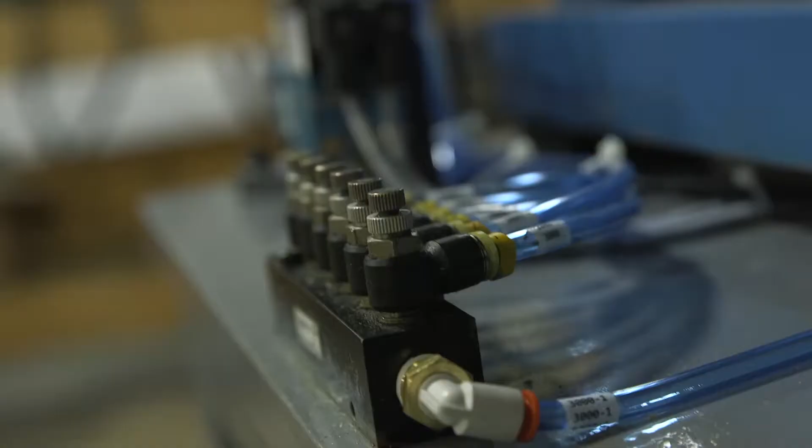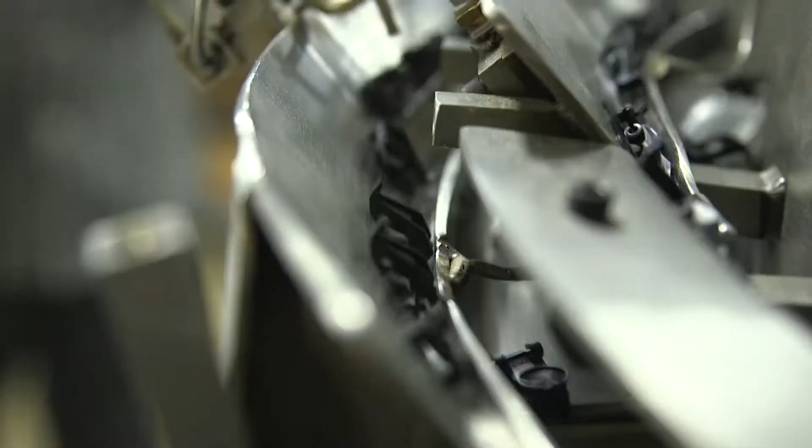It's important. Farris got its start 14 years ago in owner and chief engineer Mark Johansen's basement - you know why? Because he didn't have a garage. Now the custom machine builder is headquartered at a shop in Wales, Wisconsin, where his team designed and manufactured the company's latest custom creation, the CS sensor assembly.

In just 35 weeks, the team of mechanical and electrical engineers and programmers went from a little more than a napkin sketch to a machine that is going to run nearly 12 million parts per year for a plastic molding company. The machine assembles a part that fits into your seatbelt housing.

When you hit the brakes in your car, a ball bearing trips the lever which locks your seatbelt. The plastic molding company came to Farris because it needed a machine that not only snapped these levers into the housings, but also quality tested every part. And all of this had to happen in 1.2 seconds. A lot can happen in 1.2 seconds.

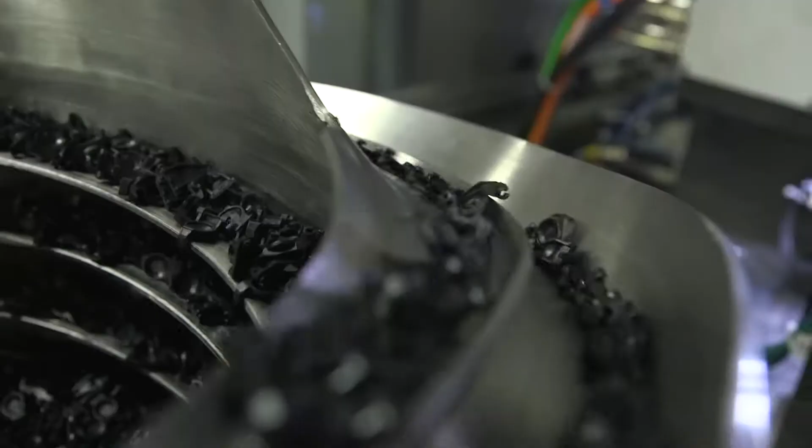First, the levers and housings are fed through a feeder bowl and into the assembly where machine vision cameras verify the part's dimensions. Faulty parts are rejected and good parts are placed into the housing.

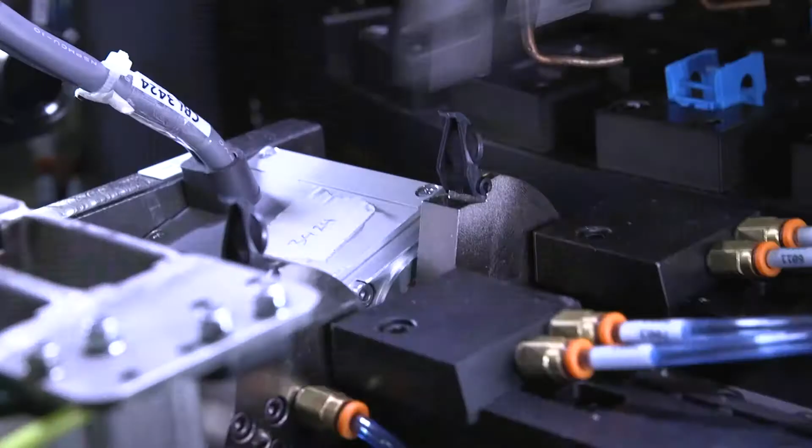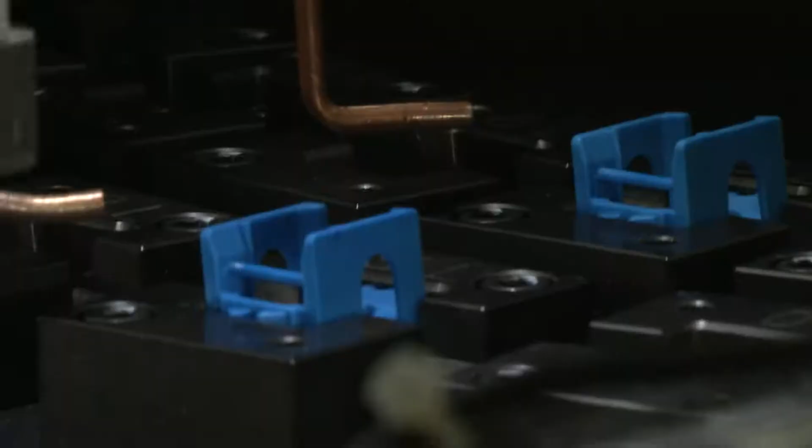Once the lever has been placed into the housing, a valve shoots a short blast of air to perform a binding test. Basically, it pops the lever up and a laser sensor reads how long it takes to fall. Passing parts are grabbed by a gripper and unloaded, and parts that fail are dropped down a chute.

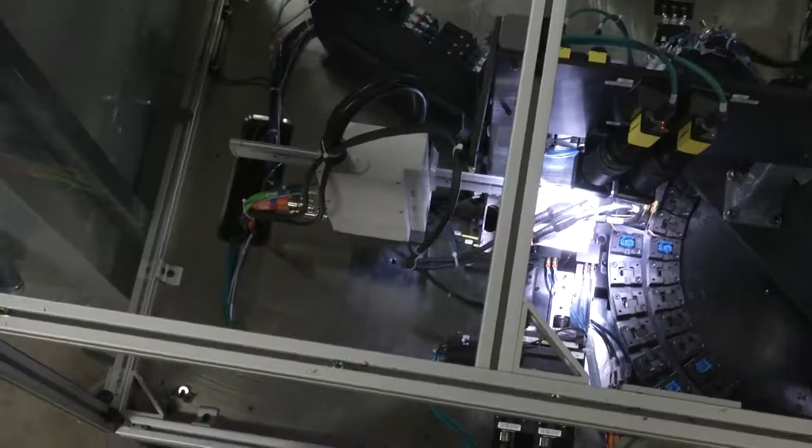In order to hit that 1.2 second mark, the machine has to be perfectly orchestrated, employing 8 different cameras, a robot, 9 valves, a couple of grippers, and 16 axes of motion among a host of other components.

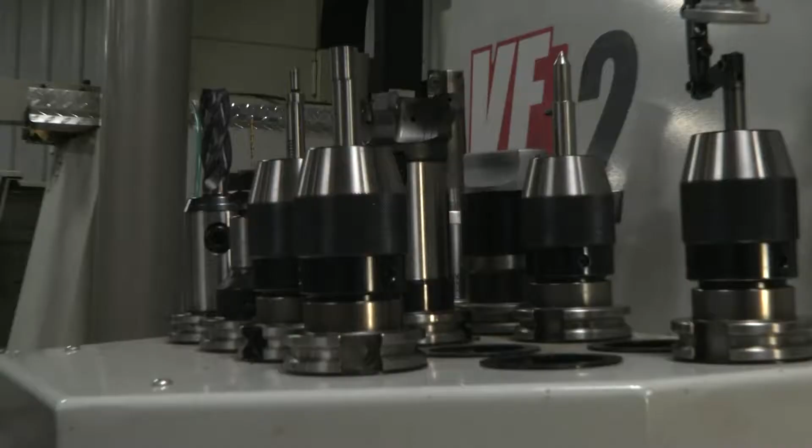Farris machines nearly every part of the CS sensor assembly on its in-house CNC mills and lathes, including the primary fixture that they call the nest. The nest is a big part of what makes this machine special, because it can hold 5 different housings.

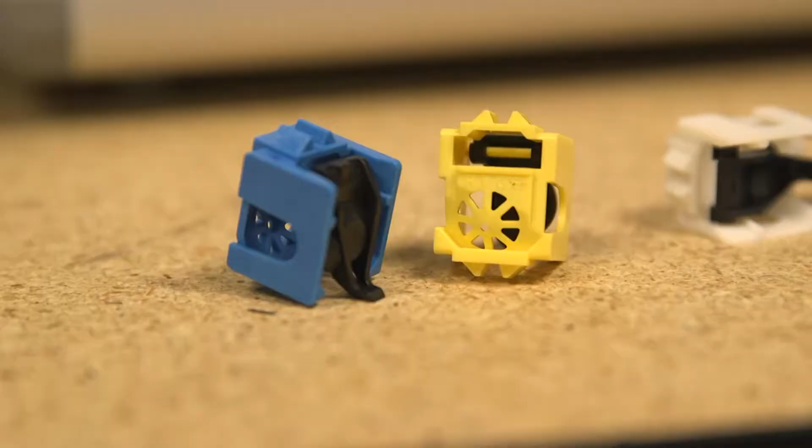Depending on the seatbelt, the housings are slightly different, sometimes as little as a 3-degree difference. On old machines, the plastics company would have to shut it down and change the setup to accommodate for the new part. The process took 8 hours.

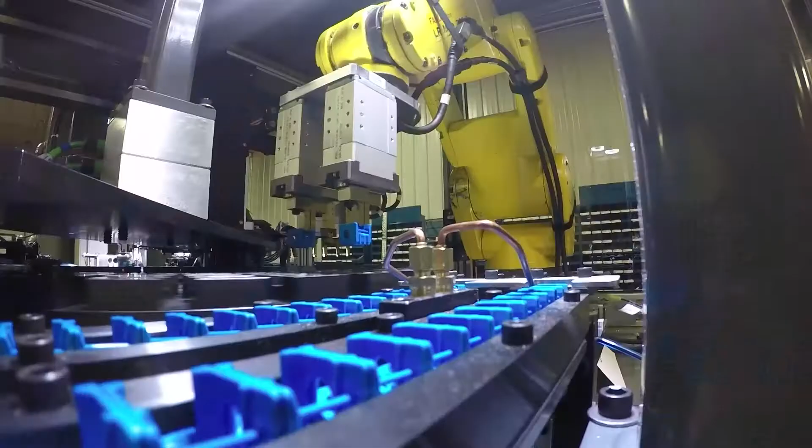The new CS sensor assembly reads the floral pattern on the bottom of the housing. This tells the robot where to place it in the nest. Because the nest can accommodate every housing, part changeovers are now little more than filling the housing hopper with a new part. The rest is pretty much automated, taking an 8-hour process and making it happen in 10 minutes.